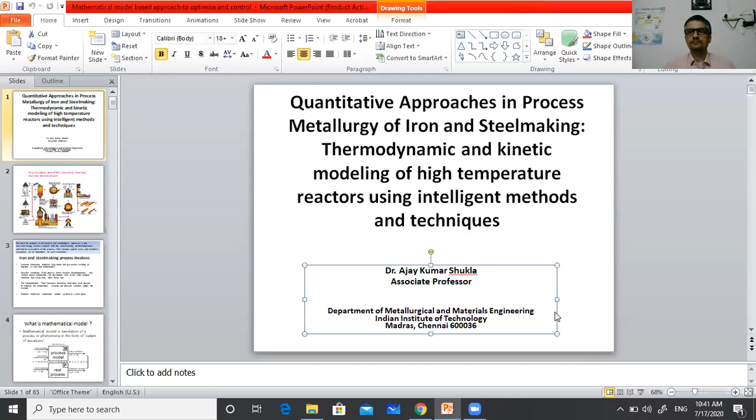Okay, so today the topic of my talk is on quantitative approaches in the process metallurgy area of iron and steel making. That means, first of all, I would like to explain what is the meaning of quantitative approach. Quantitative means something which we can quantify.

For example, if you look at the history of iron making and steel making, people were producing all kinds of metals, not only iron and steel, since a very long time. In fact, all our earlier civilizations were named after some metal, for example the Bronze Age or Iron Age. Metals were being produced and used by human civilization since a long time, and people did not even understand the basic underlying principles, the chemistry or reactions based upon which those metals were being produced, but still they were producing them.

There has been significant development in the last century, especially after the Second World War, as far as the understanding of high temperature melts, as well as the thermodynamics and kinetics of high temperature processes. Based upon that, people were able to understand the quantitative implications of these processes.

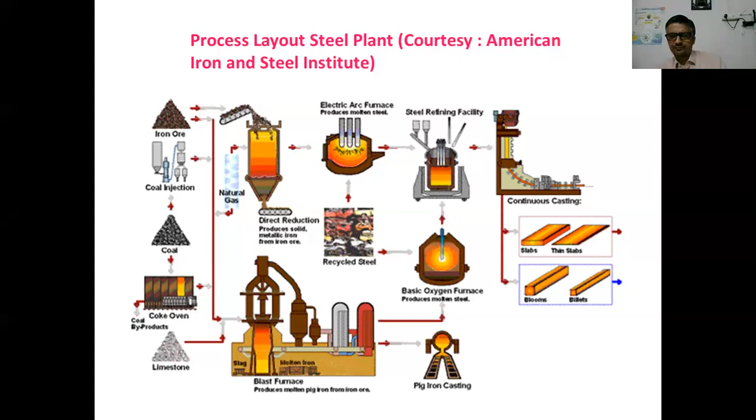So as we can understand, the basis for analysis of all chemical and metallurgical processes is the mass and energy balance. That is the starting point.

At least even if we do not have any idea about advanced concepts like thermodynamics and kinetics, if we want to start or develop any process, the first thing is what we want to produce and what we want to use. Based upon that, if the process involves any increase in temperature, then from where will we get the energy? So for that, there is a requirement of fuel. The mass and energy balance is the step which I think all processes have in common.

And then in addition to that, the understanding of thermodynamics and kinetic constraints of the process. All this understanding, coupled together, is used for plant design, capital cost, and technical evaluations in the steel industry. Talking about the nature of the iron and steel process in general, basically the high temperature process involves the interaction between the slag and metal.

So obviously, the high temperature process will always generate a liquid melt, that is the liquid metal and liquid slag, either in the iron making process or steel making process. So there's always a dynamic interaction between the slag, metal, and gas phases existing all together at very high temperature.

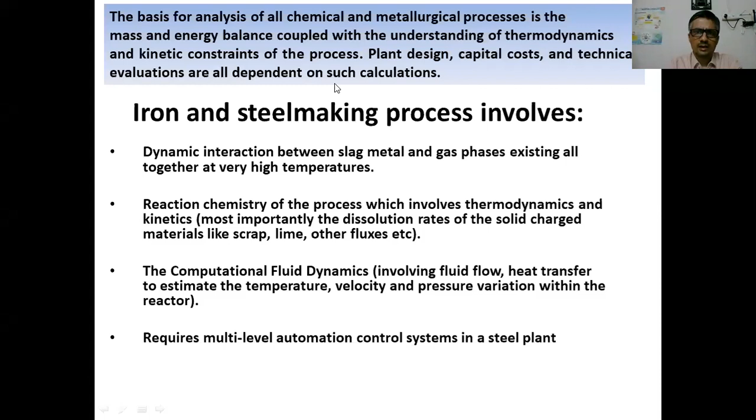And if you visit any shop floor of any process, either steel making or iron making, you will find that nowadays steel plants are being controlled by multi-level automation control systems. Out of that control system, level 2 comprises mathematical models which are guiding the process, and also making post calculations based upon analysis of past data in the steel plant.

So having talked so much, now I would like to say what is a mathematical model? You may ask, what is the mathematical model? In a single sentence, it is the translation of the process phenomena into a system of equations. Those equations may be linear in nature, or they may be non-linear in nature. They may be in the form of partial differential equations, if you're talking about time-dependent kinetics of the process.

If you're just doing a simple heat and mass balance model, then it may be a simple linear model. If it is only a mass balance model, involving only elemental balances, or if it involves a heat balance model, then it may be a non-linear set of equations, because the heat balance has non-linear terms.

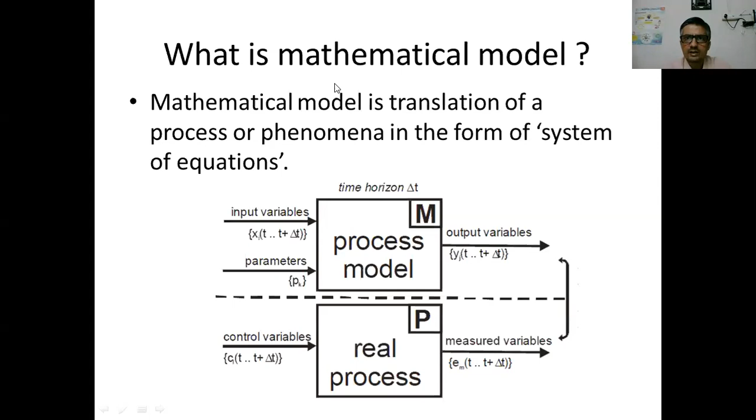Basically, those models can be used in both ways - either feed-forward control or feedback control. One way could be that it is able to predict the future course of the process. Another way could be that it is integrated with online measurements, and based upon the feedback coming from the online measurements, it can further be used to guide the input operating parameters to bring the process onto the proper track.

So the mathematical modeling of the high temperature process based upon quantitative methods assists the plant engineer in optimizing and controlling complex processes in an efficient manner. The mass and energy balances of individual unit processes, or collective balances for the entire supply chain, coupled with quantitative approaches based upon thermodynamics and kinetic modeling, serve as a basic tool for minimizing cost of production and CO2 emissions, as well as achieving quality and productivity targets.

So what are the modeling techniques which are being used in general to optimize and control the process? The first, very general technique is based upon the fundamental approach - that means a simple fundamental model based upon mass balance and heat balance involving thermodynamics. If I'm talking about thermodynamics, it could be a single reactor based model.

Or if I'm talking about kinetics, it could be a model where the reactor has been divided into a number of parts. Some part is in thermodynamic equilibrium, other is in non-equilibrium, and there may be a stream of flow of material to and fro, which is guided by the kinetics of mass transfer.

Then another set of models are based upon the data-based modeling approach. So basically in the steel plant, if you go and see any steel plant, the automation control system, you will find that a lot of data is being stored on a process to process basis, daily, weekly, and monthly basis. So just by utilizing the past data of any process, we can develop a lot of models based upon the data-based modeling approach.

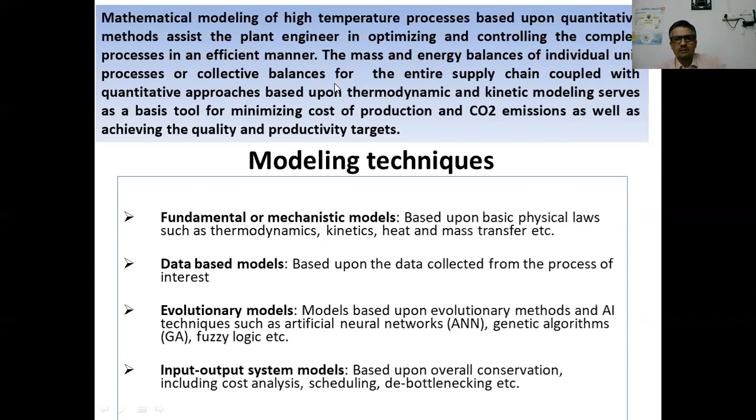Then evolutionary models, that means models based upon artificial intelligence, like artificial neural network, genetic algorithm, fuzzy logic, etc. So these are the techniques, and then input-output system based models, which include cost analysis, scheduling, debottlenecking, etc.

So what are the objectives of the mathematical models?

The mathematical models play a key role in process design, analysis, control, and optimization through quantitative representation of the process. For example, earlier, when people had no scientific idea about iron and steel making, they were still producing iron and steel in great quantity. Then trial and error was the only method to optimize and control, because we did not know the effect of other parameters.

We cannot precisely quantify that. For example, if we increase the flux rate by some quantity, what is going to be the change in the refining behavior of the process? Or if we make a change in iron ore quality, how much will the coke rate increase for unit change in quality parameters of the raw material? That kind of understanding was not there earlier.

But if we develop some kind of framework or model which can give that kind of understanding, I think that will help a lot. Then optimization, that means minimizing cost or maximizing profit. One more thing I would like to add is minimizing CO2 emissions also.

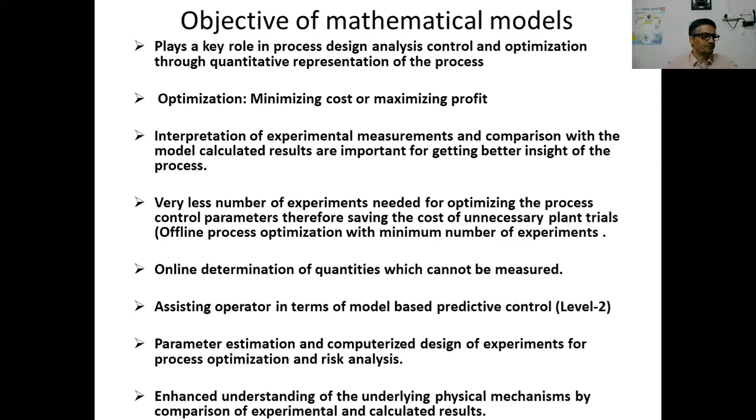So what are the steps in mathematical modeling? These steps are very well known - mathematical modeling is not the only exercise which is going to give us the desired target on the shop floor. It should also be integrated with comparison with plant data as well as pilot plant data.

Sometimes it is not possible to understand the mixing behavior in the reactor at very high temperature. We cannot do the high temperature experiment to understand the mixing behavior. So for that, physical models based upon similarity criteria can be developed in the laboratory.

For example, water and steel have a lot in common based upon kinematic viscosity based similarity criteria. We can develop the physical model in the laboratory and do a lot of experiments in the water based physical model under various parameters, which can be mapped back to the actual process based upon the similarity criteria. And we can understand the effect of various operating parameters on the mixing of the reactor.

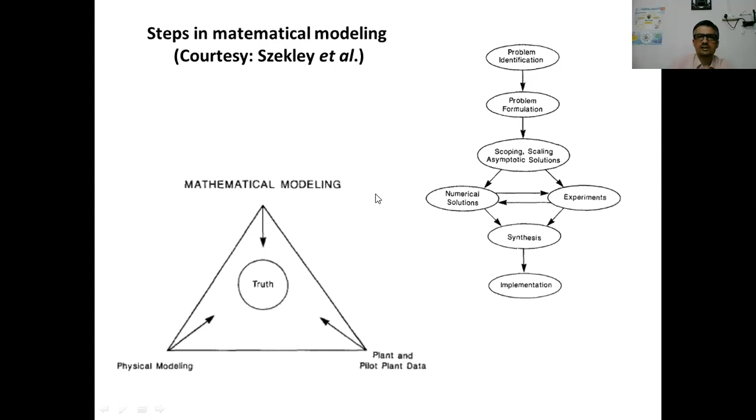So these are the steps: problem identification, problem formulation, scoping, scaling, and then once you have the set of mathematical equations, you require numerical solutions. Then the results are compared with the experiments, and you synthesize them together. After a lot of this cyclic process and understanding, once the results are useful, they can be implemented.

So the methodology of mathematical modeling involves understanding the objective of the problem to be modeled. It requires literature review and going through similar kinds of work. Then problem analysis, setting up pilot plant and laboratory experiments, data collection, data preparation, and then development of the mathematical model.

Once the mathematical model is able to give you results, they can be better presented - first formulation, coding, and then for presentation, graphical user-based program designing. Then the model is tested for various parameters, and sensitivity analysis of the model is done. Then the model results are analyzed, and finally implemented if the results are okay and useful.

So with this introduction about the quantitative approach and its application in the iron and steel making area, in our group at IIT Madras we have investigated a number of problems in steel making and iron making, starting from the basic oxygen steel making process - development of static and dynamic control models, flow sheet based model control using METSIM, static models for the Corex melter gasifier, and data-based modeling approaches applied to iron and steel making processes, including ANN-GA approaches.

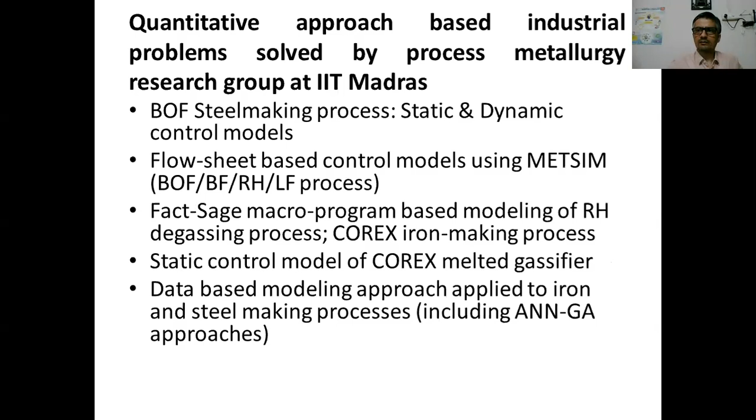So now I think we do not have much time left, so I would like to give you a brief presentation of one or two problems. I will try to give you the presentation on the BOF steel making process static and dynamic control model, and then if time remains, I will give you the development of the expert system for Corex melter gasifier based upon the FactSage macro-programming approach. Okay, and then you can ask any doubts or queries.

So the first problem which I am going to discuss today is about the development of static and dynamic control model of BOF steel making process and its validation with steel plant data.

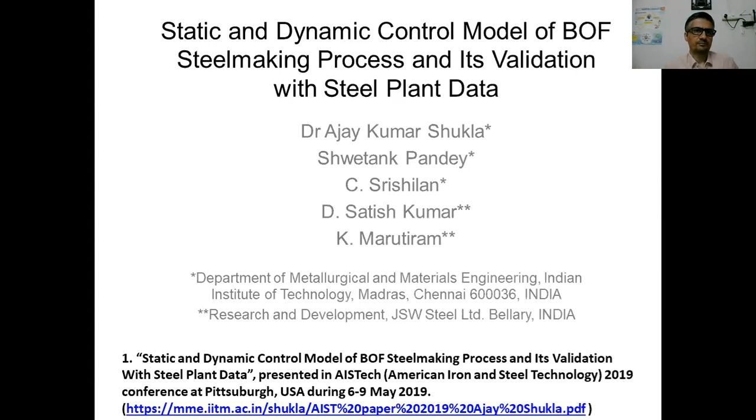That means to remove the impurities present like carbon, manganese, silicon, phosphorus. All these impurities are being oxidized, and then they are being combined with the flux that is being added during the process.

Also the process involves a lot of oxidation reactions which are exothermic in nature, so they also help to dissolve the scrap and other coolants. The entire process involves slag metal reaction, that means the evolution of slag with time as the lime dissolves.

The FeO is required for the dissolution of lime. Why? Because if you look at the CaO-FeO-SiO2 phase diagram, you will find that lime is not going to dissolve unless you form FeO. That means any combination of CaO and SiO2 is going to have a very high melting point, much higher than the steel making operating temperature. So unless you mix it with FeO, its melting point is not going to be reduced and it is not going to form liquid slag.

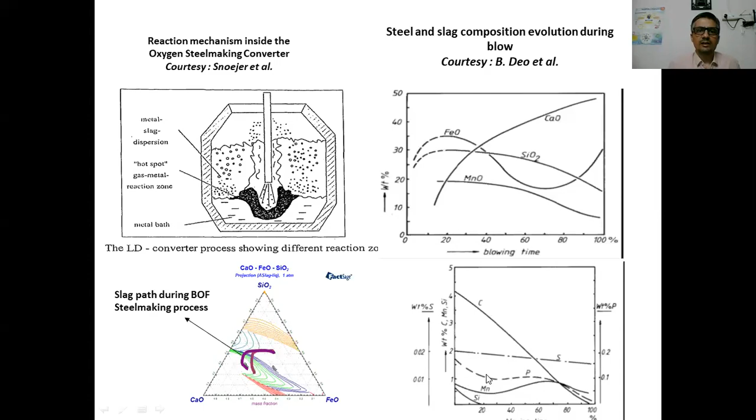Looking at the mechanism of the steel making process, the oxygen which is being injected into the liquid metal gets dissolved into the liquid metal first. If you look at the standard free energy of oxygen dissolution, the gaseous oxygen getting dissolved in the liquid steel at 1600 degrees centigrade is having a highly negative value as far as the change in free energy is concerned.

So oxygen is getting dissolved in a very huge quantity, and as soon as it is supplied to the bath, that dissolved oxygen has a preference to react with either dissolved carbon or dissolved silicon or dissolved manganese or dissolved phosphorus.

So basically, the thermodynamics is going to operate here. As per the thermodynamic driving force, the oxygen is going to react with silicon first, then followed by other elements like manganese, then carbon, and so on and so forth.

So steelmaking is a process which involves dynamic interaction between atoms, ions, and molecules existing all together at the interface of the slag, metal, and gas phase at high temperature, and liquid slag in enough volume.

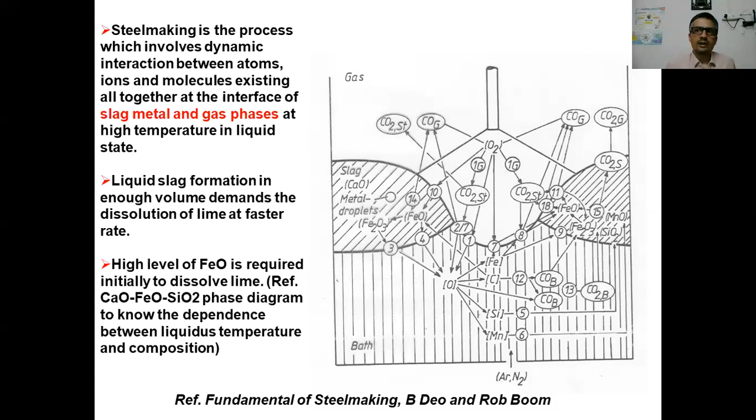So if we want to control the oxygen steelmaking process in a quantitative manner, what control measures are available? Static control models are available, dynamic control models are available, and models based upon a data-based approach like data analysis, multivariate models, artificial neural network models, Mahalanobis-Taguchi system-based models, principal component analysis-based models, and so on.

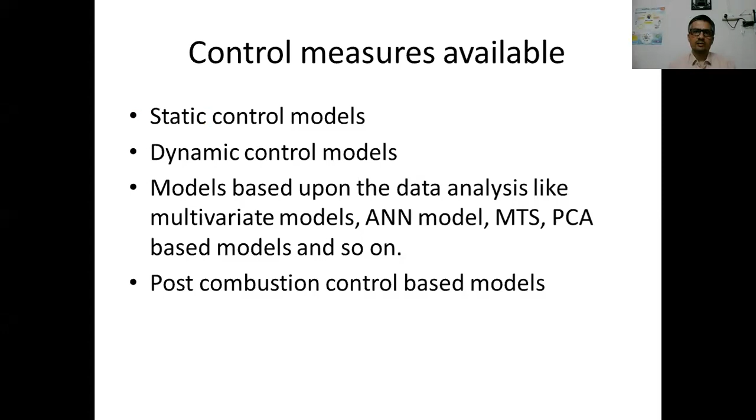It is also possible to develop the dynamic control model in the form of a post-combustion control model, which can predict the nature of the slag. So I will discuss all of these in detail.

So what is the static control model? It is based upon overall heat and material balance. If I'm talking about the material balance, it involves the Fe balance, slag balance, and oxygen balance.

It calculates the amount of flux like lime, iron ore to be added, and volume of oxygen to be blown, along with final liquid steel and slag weights for the given weights and composition of hot metal, scrap, as well as for the given endpoint conditions. Vice versa, it can also calculate the hot metal and scrap weight for other known quantities.

So basically, the static control models can be used in both ways. They can be used either for ordering the hot metal and scrap for the future heat, or for making the blowing calculations once the actual hot metal and scrap is charged into the vessel.

And these models are based upon feedback control. That means, since it is a batch process, even if you do the heat and mass balance in whatever possible manner, or even if all compositions and weights are available, there may still be some error, arising from the measurements, or from non-availability of data.

Or maybe the composition you are using in the current heat may correspond to some previous heat, and the current compositions are not available. So no matter how accurate and well you perform these calculations, there will always be some error.

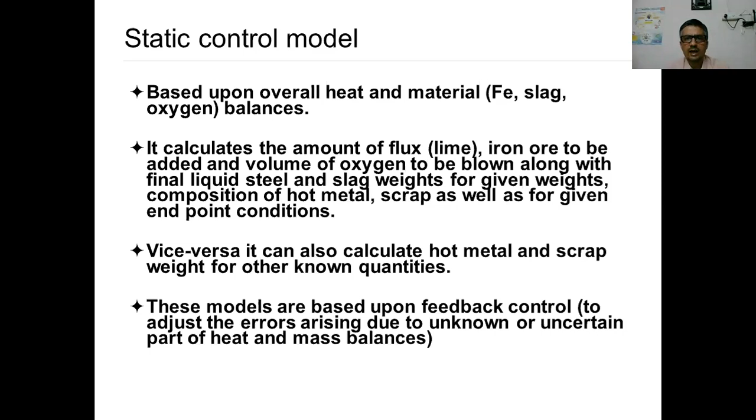So in order to adjust those errors, these models use feedback calculation, to adjust errors arising due to the unknown or uncertain part of the heat and mass balances.

So in our calculation, we have performed mass balance equations like iron balance, carbon balance, CaO balance, MgO balance, silicon balance. These are all linear equations which generate weight, waste gas volume, lime weight, dolomite weight, and slag weight. Then it is followed by calculation of oxygen volume and final temperature of the process by performing the oxygen balance and heat balance.

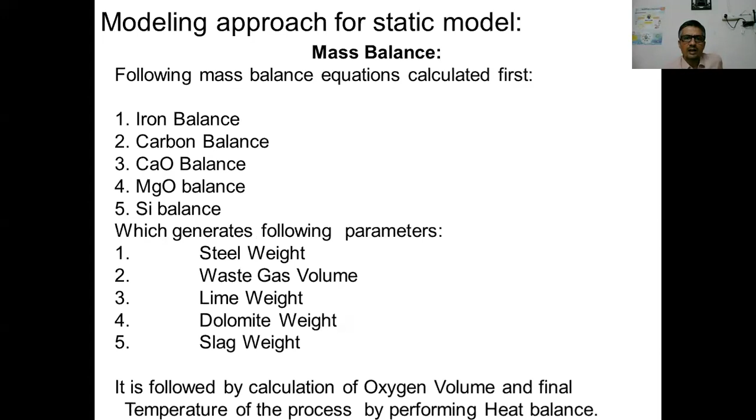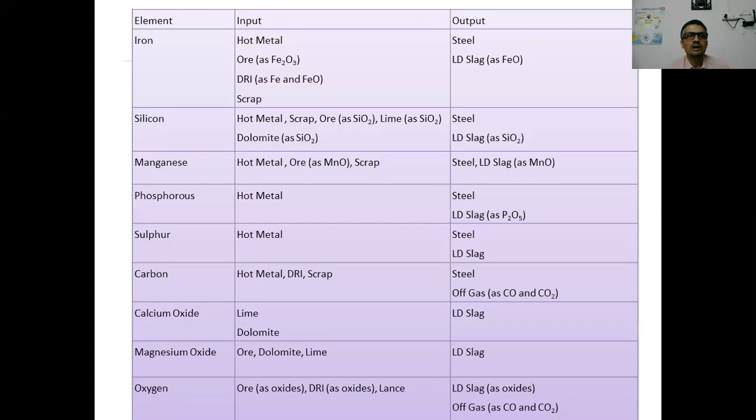So if we're talking about doing the mass balance, we must know the sources of various elements. Iron is coming from hot metal, ore, DRI, scrap, and it goes out in the form of liquid steel, and in the LD slag in the form of FeO. Similarly, for all elements we can make a table, and then the equations can be set up for the heat balance.

So for the heat balance, basically this is a very simple thing. The only tricky part is that we require the data for the sensible heat of all the elements and components present in the liquid metal as well as the slag. Otherwise the equations are very much well known.

That means we require the sensible heat of all the input parameters, sensible heat of all the output parameters, exothermic heat of reactions at a standard temperature, and endothermic heat of reactions at a standard temperature on the output side.

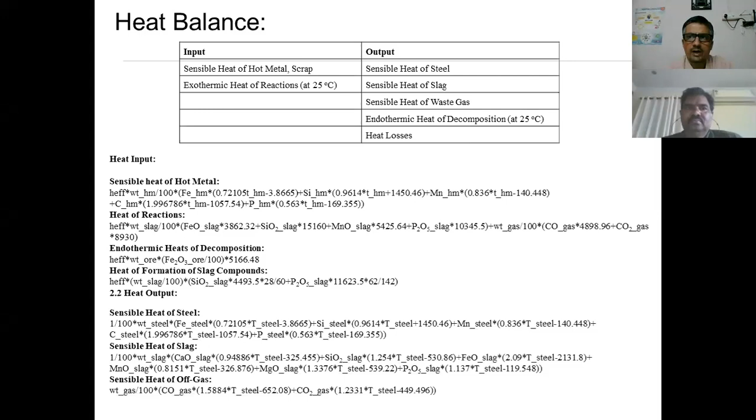And similarly, on the output side, the uncertain parameter is the heat loss - that is, the heat lost through the converter lining by conduction, or through the converter mouth by radiation. It is possible to quantify this if you have the converter dimension and design, and then we can develop those models and calculate them.

As far as the distribution of manganese, phosphorus, and sulfur between the slag is concerned, we can use thermodynamically derived equations. For example, for phosphorus, the Healey equation has been used. For sulfur, we know it is a function of basicity. Manganese distribution is a function of carbon. So all these equations have been incorporated into the model.

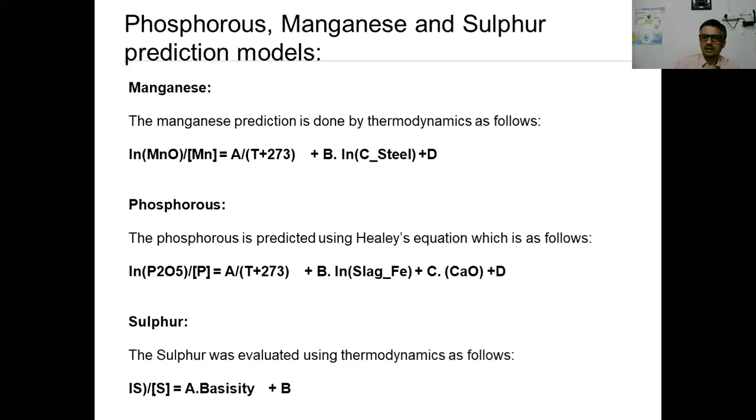And then from the steel plant, we have collected data, because once we have developed the model, unless we validate it with the steel plant data, it is of no use. So we have collected one month of heat data for a converter, and then we used MATLAB coding for development of a static control model based upon the heat and mass balance.

And then we have collected data. Out of those data, we have collected the sensible data. By using those sensible data sets, we have calculated a closing item for heat balance and oxygen balance. Then we matched those discrepancies with the actual observations and plotted them and presented them.

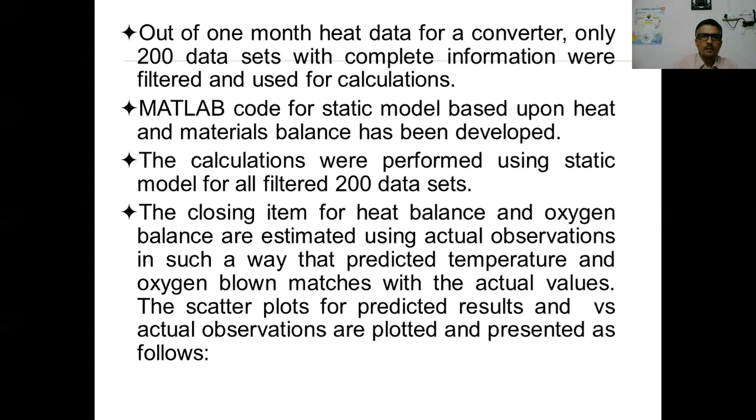So basically for the lime prediction, it is giving an R square of 0.65. Lime prediction is being done, you can say, in a very reasonable manner.

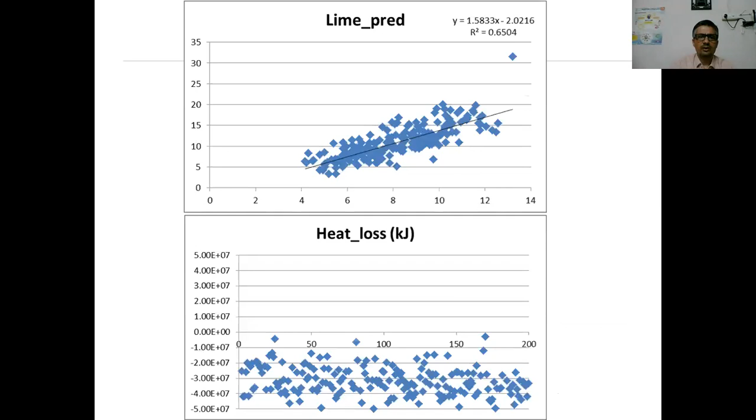As far as the heat loss calculations are concerned, we have got a lot of scatter for the heat loss values in terms of kilojoules. What we can say is that although there was a lot of scatter, if we plot the heat loss with respect to the silicon present in the hot metal, although there is a band of error, it is showing some relationship.

That means if the silicon is high in the hot metal, obviously it is going to generate a huge volume of slag. So the larger the slag volume, the larger will be the surface area covered by the slag inside the converter, as well as the surface area covered along the lance, because the lance is also immersed into the slag. Since a larger surface area is covered by the slag, if the slag volume is higher for high silicon content hot metal, then there will be a larger amount of heat loss also.

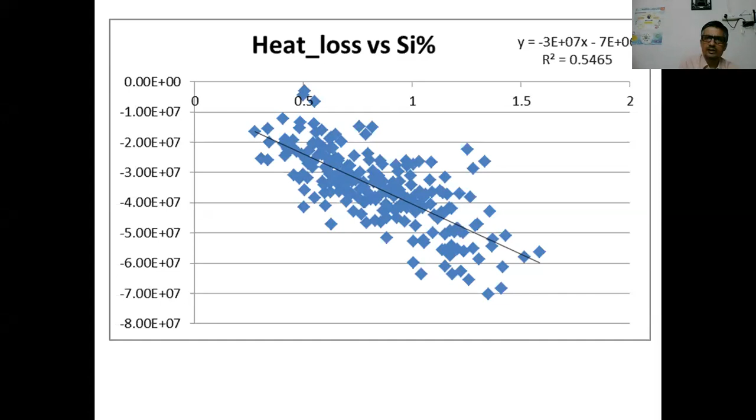Okay, so I will be talking about the heat loss - heat loss through the surface via conduction, heat loss from the top via radiation, heat loss through the lance cooling system. So all these heat losses accumulate together.

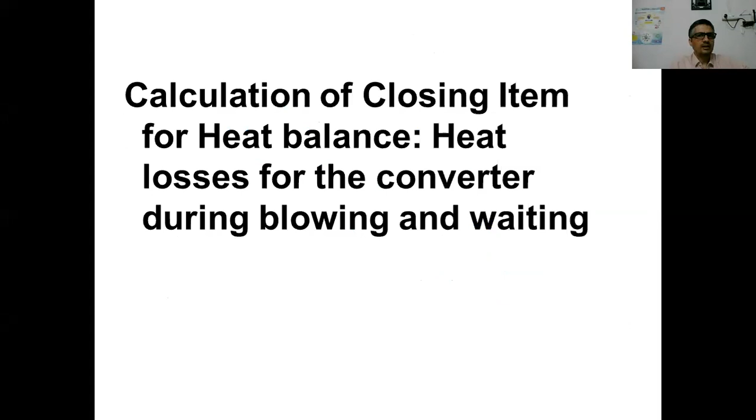So just to give you a brief idea about the calculation of the closing item for the heat balance, the heat loss for the converter process during blowing and waiting: we made the following considerations for our calculation, that heat losses take place through conduction through the refractory lining, followed by radiation from the outer shell, then heat loss through the lance, then heat loss through the mouth of the converter.

So we have developed a separate model for the heat loss calculation, and based upon the design parameters of the converter, which have been provided by the industry, we have calculated the heat loss during blowing, heat losses with the converter filled with steel, and heat losses when the converter is empty during waiting.

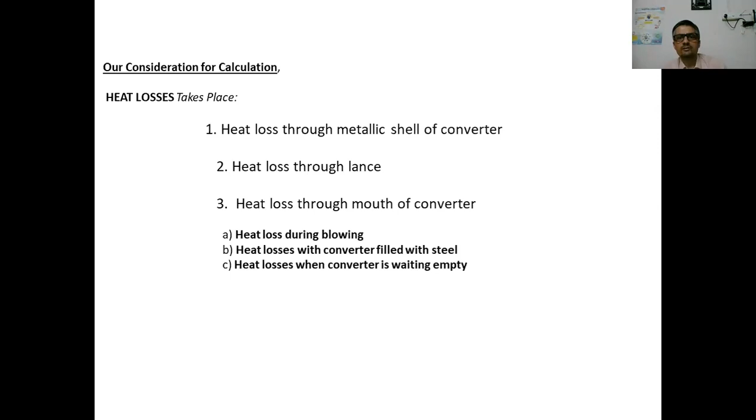Under different conditions, we have found that the heat loss by radiation has the highest contribution, and the heat loss through the shell has the least contribution. Of course, the heat loss through the lance also has a significant contribution.

But all these contributions are dynamic in nature. For example, in the calculation I have assumed some thickness of the refractory lining, but as the converter campaign life goes on, the thickness may decrease. So for the older converter, the heat loss to the shell may increase, and overall the heat loss in the older converter may be more compared to a new converter.

Similarly, when there are gaps between the heats, for example when the converter is waiting full of steel because the caster is not available, then also there are heat losses. If the converter is waiting in the empty condition for the next charge, then also there are heat losses. So all these things can be quantified and taken care of while doing the calculation.

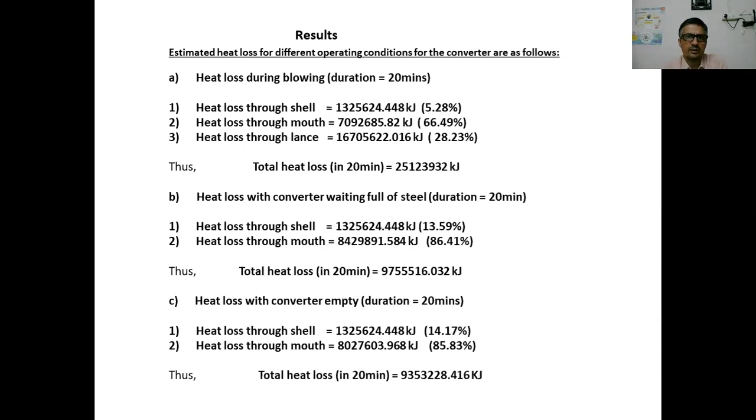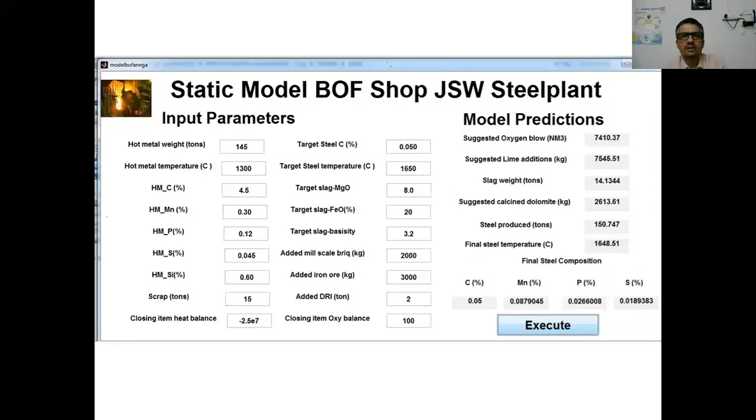So this is the static model which I have developed for the industry in the graphical user interface, where on one side one can enter the input parameters, and on the other side one can just click a button to present the results. As far as temperature prediction with static control models is concerned, we are getting very good agreement with respect to the industrial data.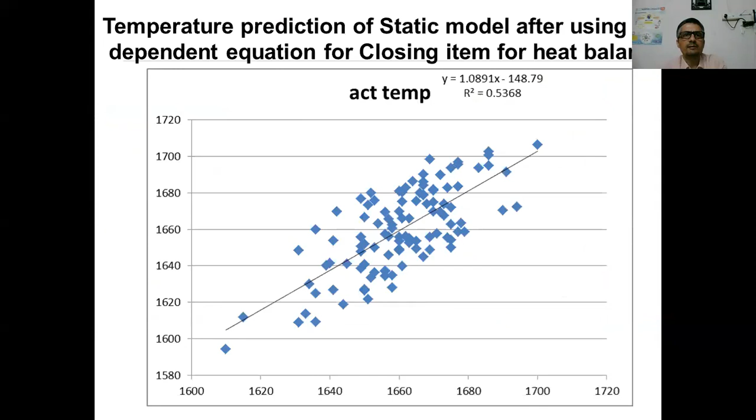Having developed the static control model, now I'm talking about the development of the dynamic control model. Dynamic control models have the capability to predict the state of the process, that means the time-dependent values of the steel and slag compositions, their weights, as well as the temperature.

The most common models now being used in the steel plant are based upon the waste gas information - the decarburization rate dC/dt, FeO level. These can be calculated by performing dynamic carbon and oxygen balance of the process from the waste gas data. People have also developed models based upon fundamental laws of thermodynamics and mass transfer concepts. A lot of literature is available on these fronts, and people may have a look at it.

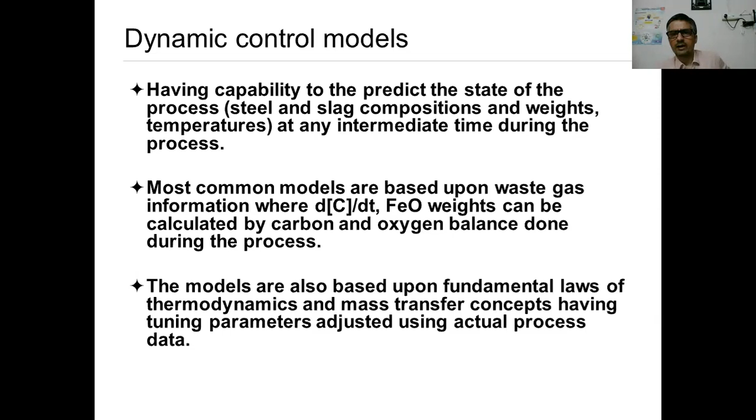In the present work, the dynamic control mathematical model in conjunction with the waste gas information has been developed. The kinetics of lime dissolution is assumed to be a function of the FeO level of the slag. Then we have estimated the transient carbon composition, decarburization rate, bath temperatures, slag composition like CaO, FeO, SiO2 - only three components, because they are the vital components.

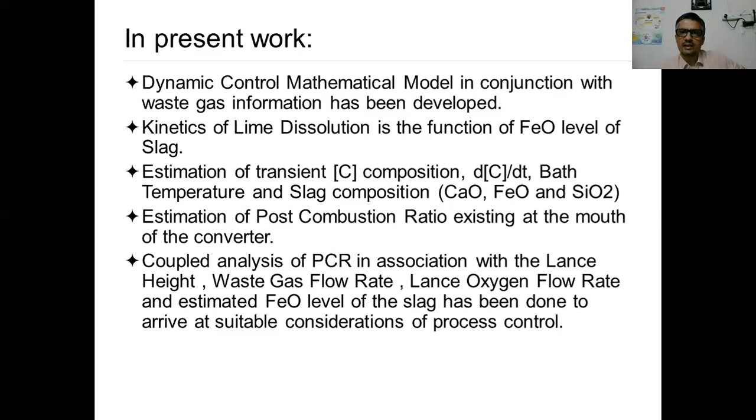Then estimation of the post-combustion ratio existing at the mouth of the converter has been done. With coupled analysis of post-combustion ratio in association with the lance height, waste gas flow rate, lance oxygen flow rate, and estimated FeO level of the slag, we arrive at suitable considerations of process control. That means with all this coupled control, we can predict the nature of the slag - whether it is dry, whether it is liquid, or whether slopping is likely to occur, and so forth. But before I proceed further, just one second.

Before I proceed further, let me give you some idea about the post-combustion control model. So what is post-combustion? The oxygen jet is impinging on the liquid metal surface at a certain angle, and it has an envelope. In this envelope, the center point has high velocity, whereas the outer surface has decreasing velocity. But after the impact of the jet...

After the impact of the jet, the carbon monoxide gas arises, coming from the impingement zone. This carbon monoxide gas may get entrained into the oxygen jet while moving upward, and that entrainment will depend on the conditions above the metal surface.

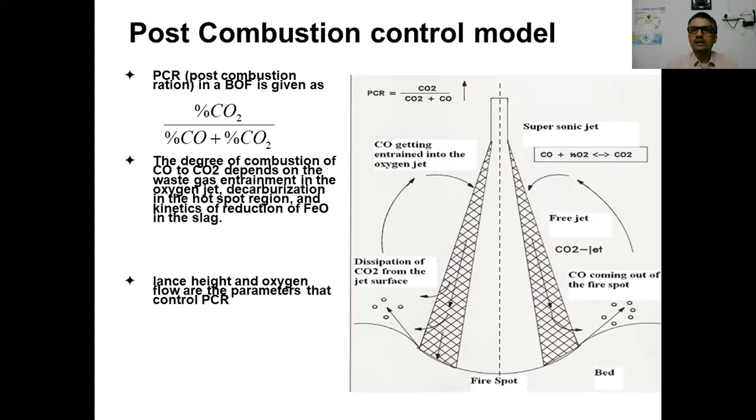Based upon the publication done by this particular group, we have made certain calculations on the theoretical post-combustion ratio as well as the actual post-combustion ratio, and its ratio, which is called beta, that is the ratio of the actual post-combustion ratio to theoretical post-combustion ratio.

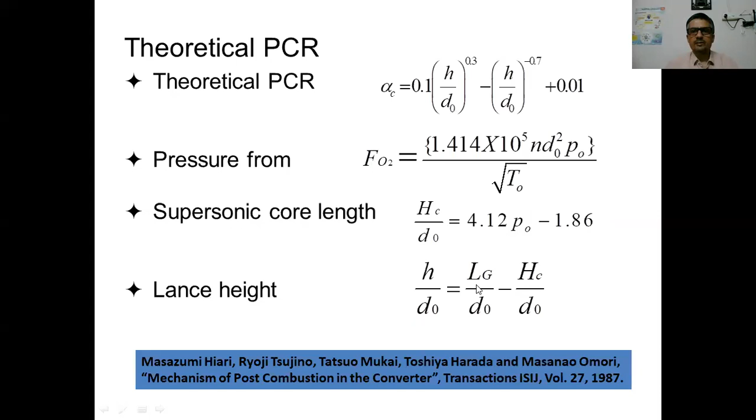So the theoretical post-combustion ratio - basically this is the lance height, the throat diameter of the lance, where this pressure is being calculated, the volumetric flow rate of the oxygen is being calculated based upon this parameter. Supersonic core length is being calculated, lance height being calculated by reducing the length of the supersonic core, and the actual post-combustion ratio is being calculated by the post-combustion data, by the waste gas data, but by considering the effect of nitrogen which is coming after entrainment.

So the waste gas percentage cannot be directly used because it is measured behind a cooling stack, which also contains some nitrogen due to entrainment of air at the converter mouth. So it cannot be used directly for calculation of actual post-combustion ratio at the mouth of the converter. We have to subtract the contribution coming from entrainment during travel from the mouth to the cooling stack, and based upon that we have calculated the actual post-combustion ratio.

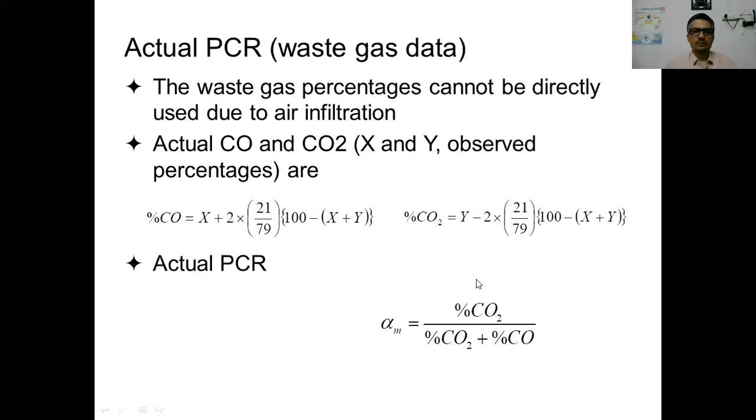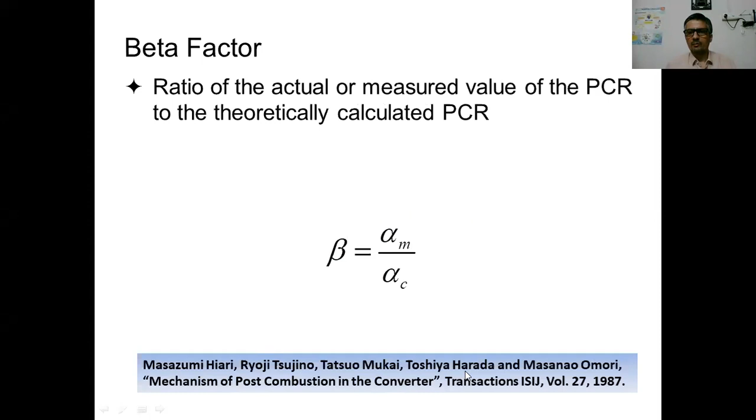Then the ratio of the actual measured value of the post-combustion ratio to the theoretical post-combustion ratio is called beta. For more details, please read this publication, Mechanism of Post-Combustion in the Converter, by Omori and Harada.

Now, how the post-combustion ratio can predict slag formation and dry blow as well. The behavior of slag formation has two aspects: dry blow versus slopping. Whatever is happening during dry blow formation is just opposite in nature to that of slopping.

In the main part of the blow, the foam height constantly decreases with time, leading to a situation where metal droplets come out of the mouth of the vessel, and this is also encountered along with a rise in the exhaust gas temperature.

So whenever dry blow occurs, two things happen: first, there is an increase in the exhaust gas temperature; second, there is an increase in the volumetric flow rate of the waste gas also.

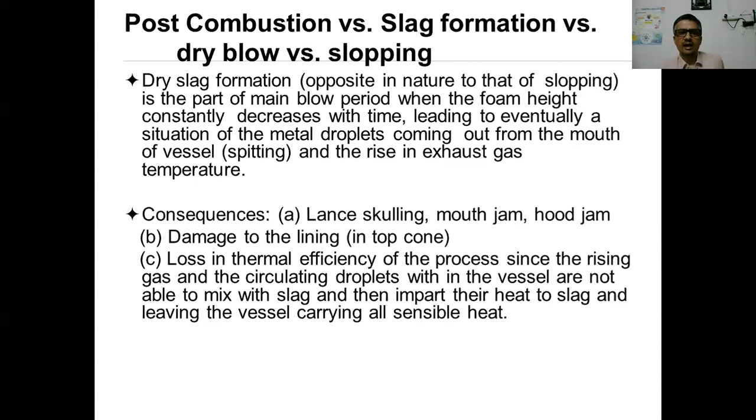The consequences are lance skulling, mouth jam, hood jam, damage to the lining, and loss in thermal efficiency of the process. Why? Because the rising gases and circulating droplets in the vessel are not able to mix with the slag and dissipate their energy to it, and they leave the vessel carrying all the sensible heat.

So we can predict the dry blow by employing the post-combustion model, and we can take corrective action. How? As we know, during the period of dry slag formation, there is a steady decrease in the post-combustion value, and depending upon that, we can predict the degree of dry slag formation.

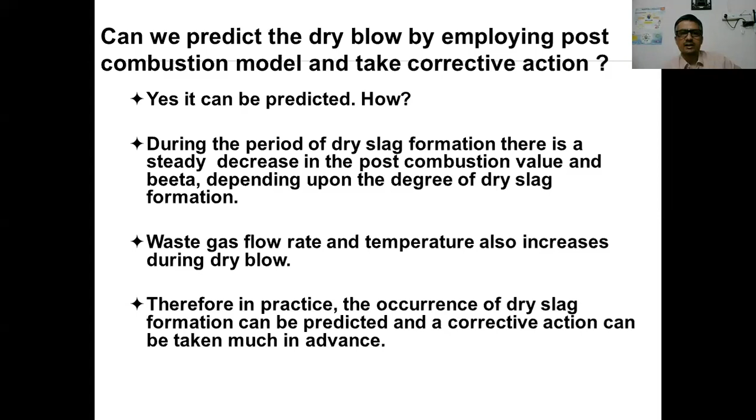Other things that can occur: waste gas volumetric flow rate and temperature also increase during the dry blow period. So in practice, the occurrence of dry slag formation can be predicted and corrective action can be taken much in advance with the help of the post-combustion control model.

So basically, these are some of the happenings being shown with respect to the plant data. There's a decrease in the waste gas volumetric flow rate, and a decrease in beta during this dry blow formation. Sorry, this is-

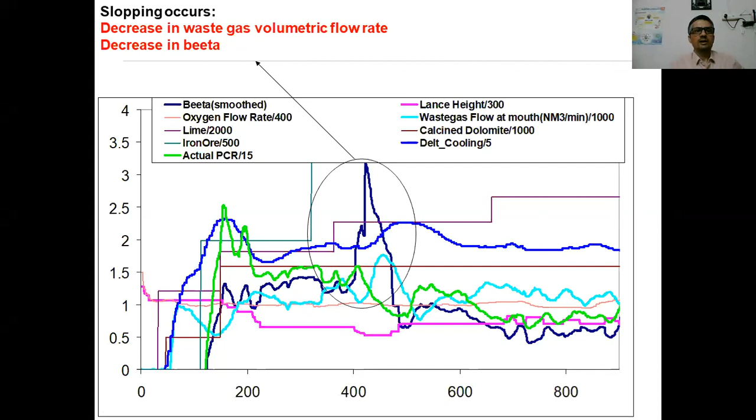during slopping. So during slopping, there's a decrease in the waste gas volumetric flow rate, and a decrease in the post-combustion ratio. Opposite to slopping is the dry blow, so in a dry blow, the opposite occurs.

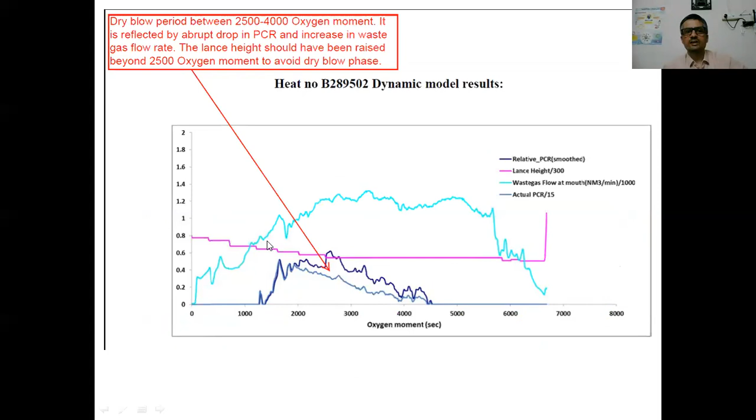So we have investigated the plant data, and based upon that, we have predicted that dry blow is occurring in this region when the post-combustion ratio is decreasing. If you look at the waste gas flow rate, there's an increase in the waste gas flow rate and a decrease in the PCR ratio.

Based upon all these calculations, we can predict those happenings well in advance, and the operator can take corrective action by raising the lance height well in advance to take care of those eventualities.

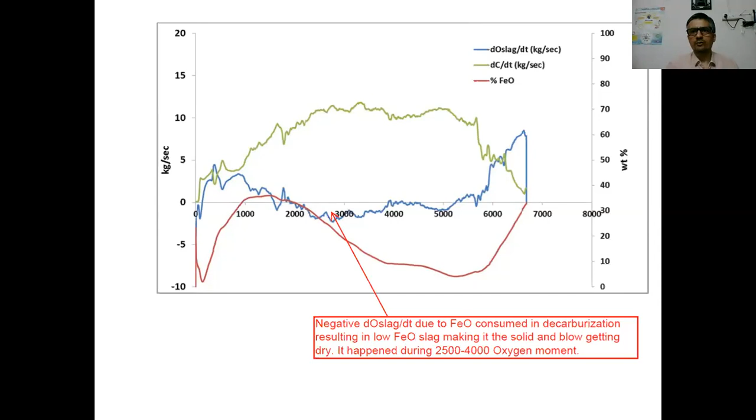Similarly, the same CaO-FeO-SiO2 data is drawn on the same plot, and the weight of slag is being predicted. This is the area at this particular moment. The operator is supposed to increase the lance height because it is going below this level.

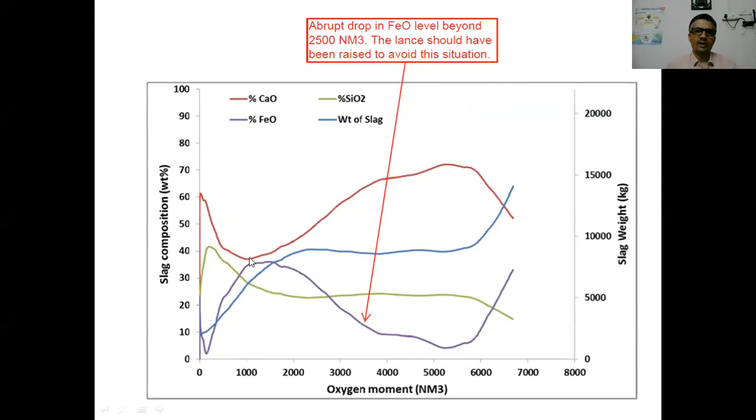One can look at these plots. If you are using online data, it is possible to develop this kind of control system in an online mode, where based upon waste gas analysis, all these plots can be generated in online mode before the operator's screen, and the operator can look at it and take certain corrective action accordingly.

So, these are the results based upon the static and dynamic control model developed using industrial data from JSW Steel Plant. While developing the static control model, proper selection of the closing item of the heat balance is very important—it was found to have a strong relationship with the silicon content of the hot metal. The calculation of heat loss during blowing by the fundamental equation of heat transfer may give a reasonable idea about various closing items.

Subsequent to that, a dynamic control model is developed using waste gas information, which helps predict dry blow and slopping well in advance by monitoring actual post-combustion and relative post-combustion ratios, along with waste gas flow rate at the converter mouth, lime dissolution rate, basicity, FeO level, and decarburization rate.

The oxygen in the slag can also be predicted dynamically, which helps further predict the nature of the slag in addition to dry blow prediction. Corrective action can also be taken well in advance by the operator, such as raising the lance height when there is a steep drop in post-combustion ratio and FeO content, a rise in waste gas flow rate, a steep rise in d[C]/dt, and a prolonged negative value of DO slag/dt. Please note that this statement is very important.

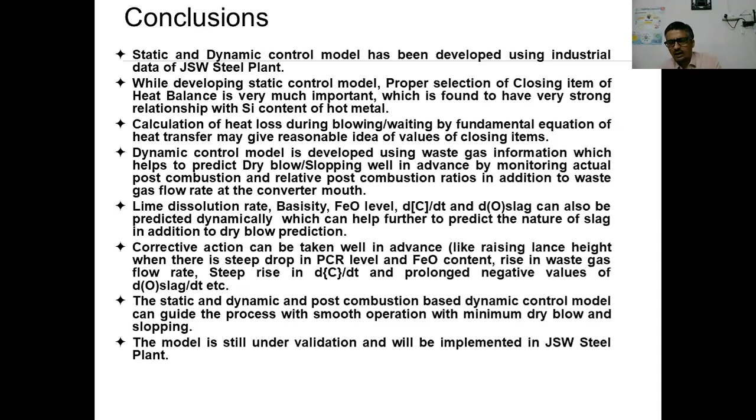Basically, the Corex process is one of the commercially applied non-alternate iron making processes that involves smelting as well as reduction. In the reduction shaft, one of the added advantages is that you can use coal instead of coke, as in the blast furnace. If you look at the process, it has two steps: pre-reduction, followed by gasification, and then reduction of the remaining iron ore, followed by melting and other things.

In the reduction shaft, this iron ore is being pre-reduced using the high calorific value waste gas coming from the melter gasifier. This process can also be modeled, and we can apply a similar kind of quantitative framework of understanding to the process.

What could be the adverse consequences? First of all, we are using a lot of coal in this process. Coal has a lot of ash, so obviously the slag volumes are going to become much higher for this process, compared with blast furnace iron making.

In addition, if you are also using iron ore of lean quality, it will further increase the coal rate. Slag volume analysis can also be done with the help of this modeling-based framework.

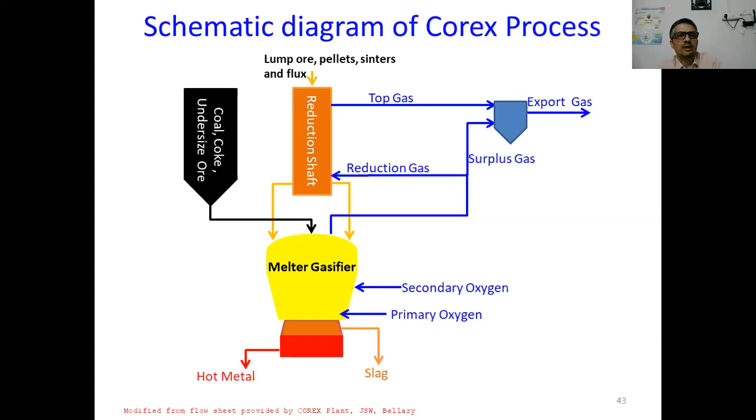Since time is running short, I'll quickly go through these slides. We have developed a single zone static thermochemical model for the melter gasifier.

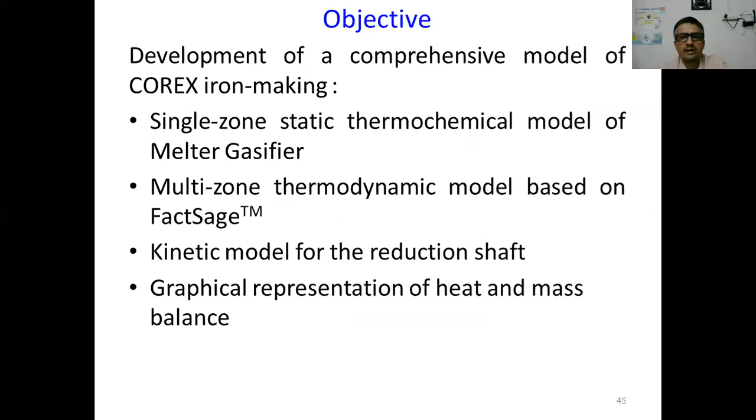Then a multi-zone thermodynamic model based upon FactSage has been developed. A kinetic model has been developed for the reduction shaft, and finally a graphical representation of the heat and mass balance has been presented for the entire reactor.

For the single zone static model, material balance and heat balance have been performed, the post-combustion ratio has been calculated, and the degree of metallization has been defined.

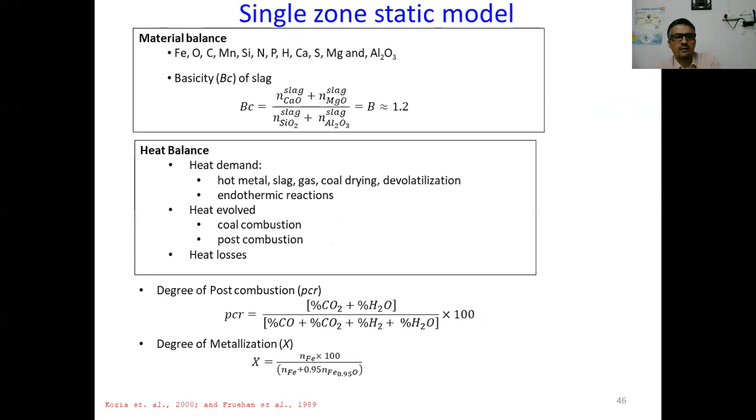Now I'm going to the results. The result of the static control model is shown in this graph: the variation of coal, flux, and oxygen for different levels of metallization in the pre-reduction chamber.

As metallization increases, the requirement of coal decreases, which is very much obvious. An increase in the post-combustion ratio decreases coal requirement, flux requirement, and oxygen requirement, and increased metallization decreases coal requirement, flux requirement, oxygen requirement, and export gas produced.

These are all well-known effects, but the question is in how much quantity they occur. For that, we required a model framework, and we have developed it. We performed the calculation using data given by a certain steel plant, but we can do similar calculations for other steel plants also, or within the same plant.

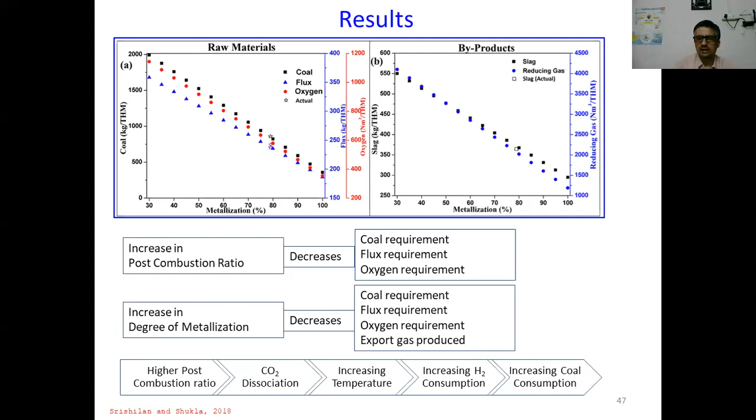If tomorrow the situation changes and they use a different kind of raw material, fuel, or design, this model can be further tested and used as a guiding tool.

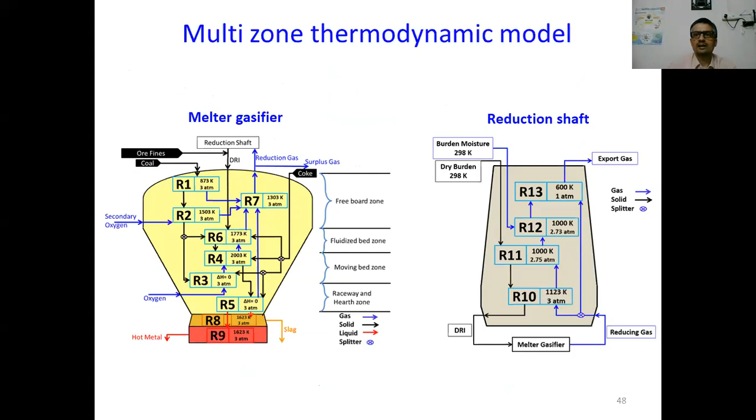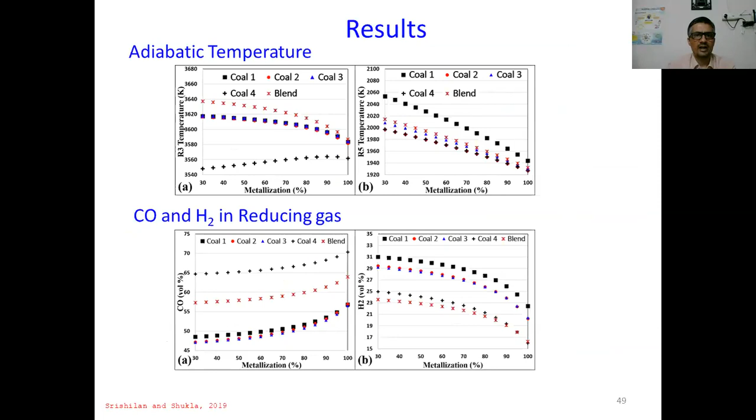Then the multi-zone thermodynamic model has been developed, where the process has been divided into a number of zones, and similarly the reduction shaft has also been divided into a number of zones. Based upon that, we made calculations of adiabatic flame temperature, CO and H2 in the reducing gas, and the effect of coal type on the hot metal composition.

The reason is very obvious: higher metallization requires lower coal, meaning a lesser amount of ash is introduced into the system, so you obviously get lesser silicon content in the hot metal also.

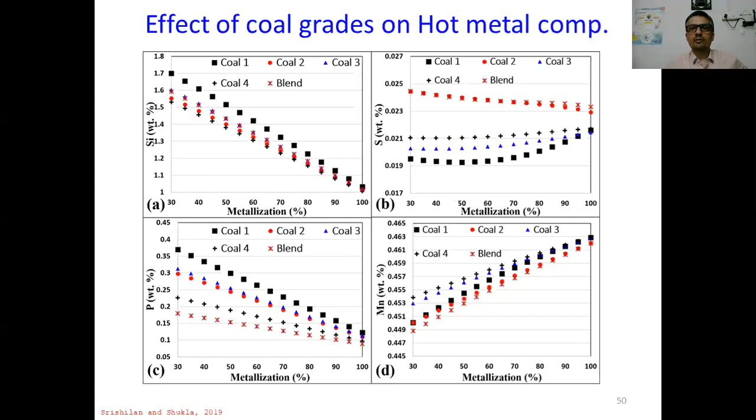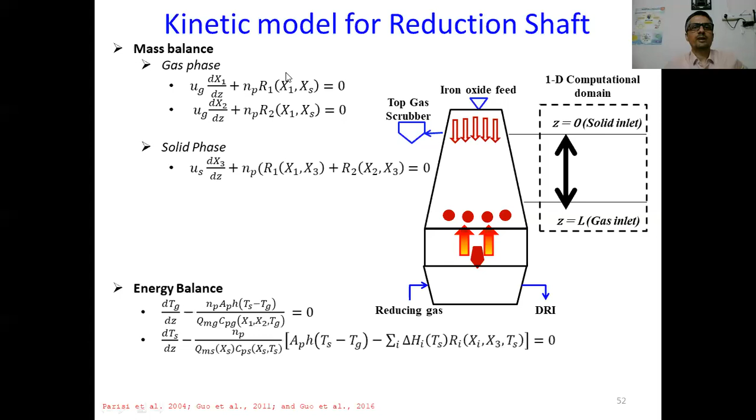I'm just skipping a few slides. The kinetic model for the reduction shaft has been developed based upon dynamic mass balance and energy balance.

I just want to conclude here, because giving a detailed presentation of the Corex process would require another hour, and I don't have so much time now. Again, I would like to thank the management of OP Jindal Institute for organizing this wonderful conference in a much needed area of process metallurgy.